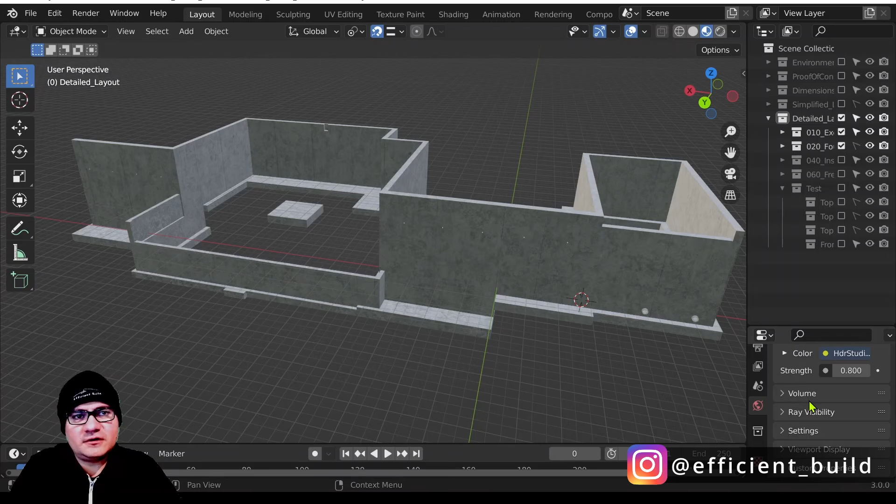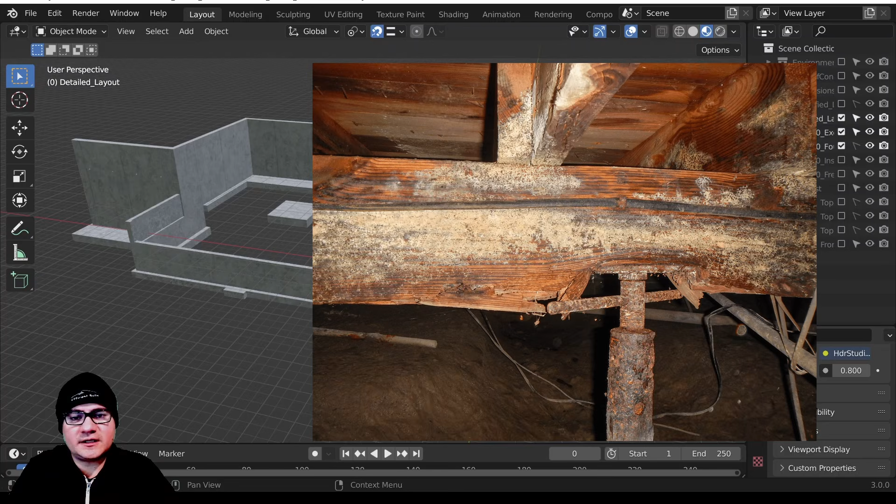If you're not aware of this, concrete is actually porous and has the tendency to absorb water. This water can eventually seep into your below-grade basements and similar structures, and it can rot your materials inside the house. It can create an unhealthy environment such as mold. And even from the structure perspective, it can make its way to the rebar and corrode it, eventually degrading the performance and quality of your house. That's why waterproofing is so important.

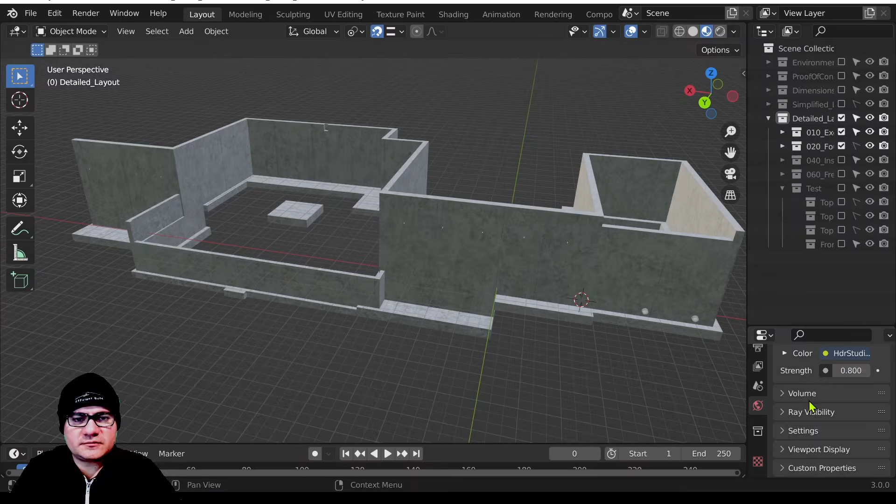So let's talk materials. The system that we liked the most was Polywall Building Solutions' waterproofing system for foundations. We really liked it because it is easy to apply, or it appears to be easy to apply.

And the reason I say that is because we actually didn't end up using the full system. But let me explain how it works, and then I'll explain the intricacies of it.

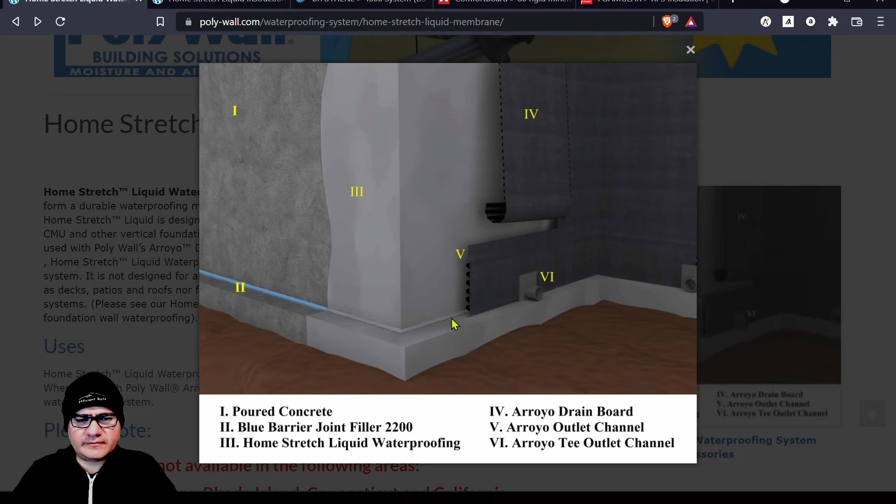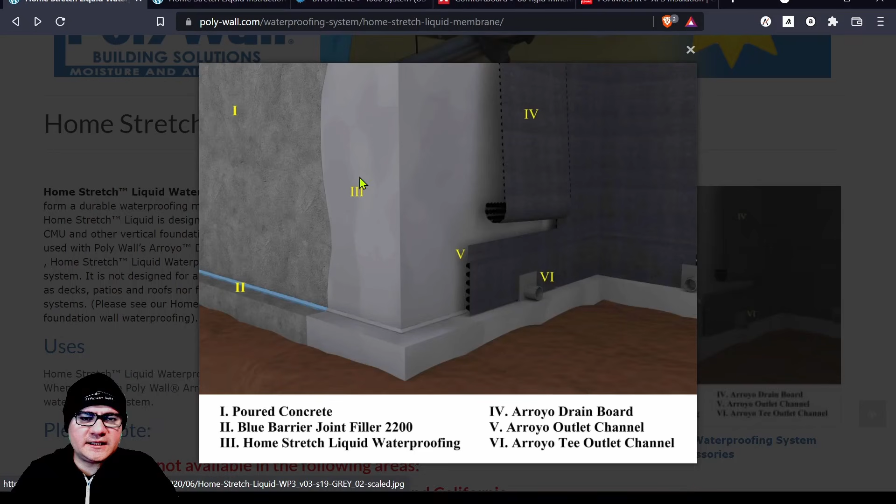So the first step in doing the waterproofing for the foundation would be to apply the blue barrier joint filler, effectively this blue thing you see here. Its purpose is to protect all cold joints, for example the gap between the stem walls and the footing, and also to protect any big holes that may be in the walls. That is additional protection for water.

Then the next step would be to apply the Homestretch liquid waterproofing, and this is mostly the reason why we ended up liking this system. It is actually liquid applied, so you can spray apply or roll it. It's very similar to painting, so you'd need to apply 3 coats, each coat taking a day to cure. It seemed extraordinarily easy to apply, and that's why we ended up choosing this system.

Finally, there's the Arroyo drain board, and what this does is give water a path to exit and be diverted away from the foundation. As you know, water is the enemy of all houses. Effectively, water can seep into this drainage mat, come down, and then be expelled onto the French drains and diverted away from the house.

All that said, we did not end up using the Homestretch liquid waterproofing, and the reason is cost. So we ended up using GCP's Bituthene 4000 system.

This is a peel and stick application, kind of like a plastic HDPE that gets glued onto the stem walls. The only reason we didn't end up using the liquid Homestretch from Polywall was cost. When we were about to purchase it, the price tag came in at around $18,000, and we thought this was a little bit crazy for us, at least in our case.

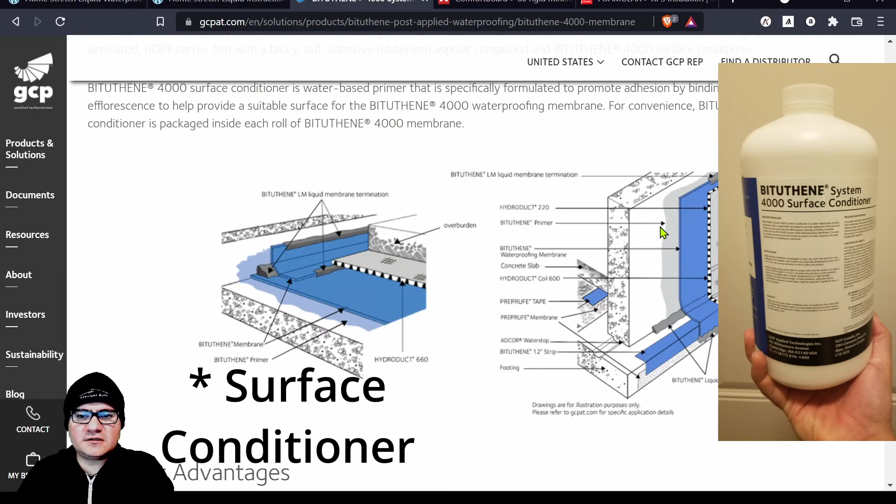The first part of their system is to apply the Bituthene surface conditioner. What the Bituthene surface conditioner does is capture the dust coming out of the green concrete. If you've been near green concrete, you'll realize it's an infinite source of dust. It doesn't matter how many times you clean it, next time you come around it's full of dust again. Who knows why, but anyway, the surface conditioner captures all this dust and creates a nice surface for the Bituthene membrane to be stuck or applied to the wall.

So then the next step is to apply the Bituthene liquid membrane. Notice this actually covers the same functionality as the Polywall Blue Barrier 2200.

We ended up using Blue Barrier 2200, because that's what we were going to use for the full system, for the cold joints between the stem wall and the footing. We also purchased a liquid membrane Bituthene mastic for the borders between the membrane and the concrete at the top of wall and at the footing.

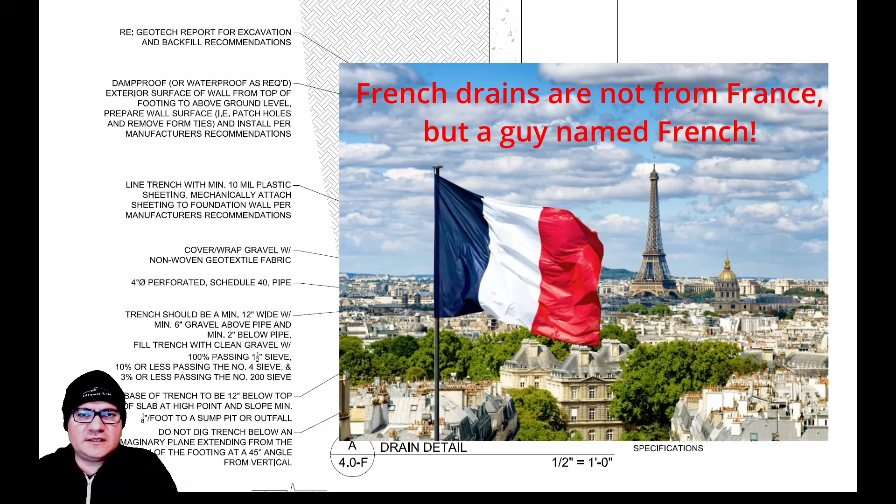So let's talk about French drains. What is a French drain? The main purpose in life of a French drain is to divert water away from the foundation should it ever accumulate next to it. This is a nice little detail provided to us by our soils engineer.

As you can see here, we have the stem wall, the footing. This is a slab and whatnot. And here's the French drain. The requirement is to have a 10 mil plastic, equivalent to the Bituthene 4000 we are using, except ours isn't as short as this—we run it through the entire wall because we don't want any water penetration.

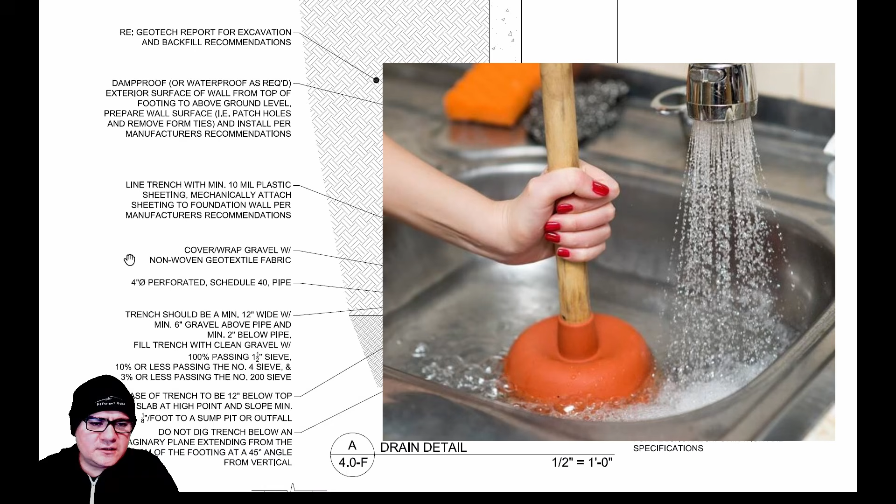Then we have the non-woven geotextile fabric, a very important component. It's actually like a filter—it allows water in but doesn't allow dirt to go through. That makes it so the Schedule 40 PVC inside doesn't get clogged. It's not the same textile fabric you'd buy for gardening at Home Depot; those can allow dirt through and clog your pipe. So it's very important to use non-woven geotextile fabric.

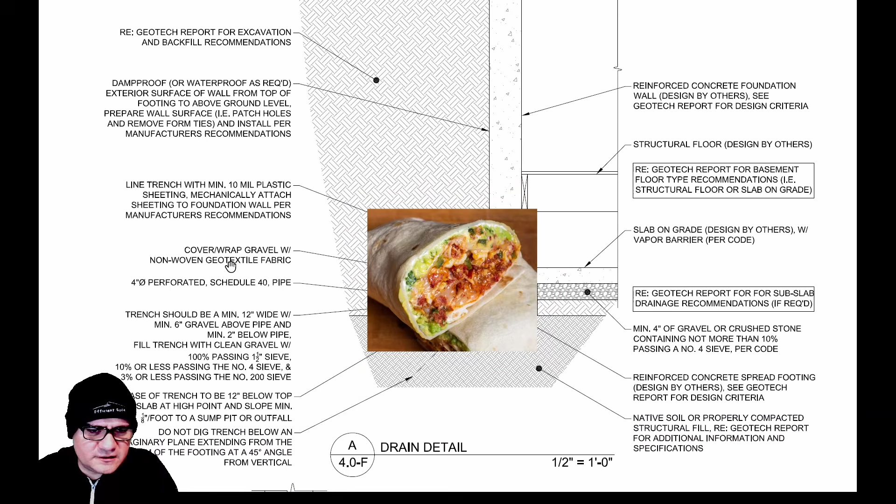Finally, here you have the crush rock. As part of the burrito, that could be the rice. The non-woven geotextile is the tortilla, and your 4-inch Schedule 40 perforated pipe is the meat. Schedule 40 is important because, as you notice in this detail, there's a lot of dirt and weight, so you need a pipe that can handle it.

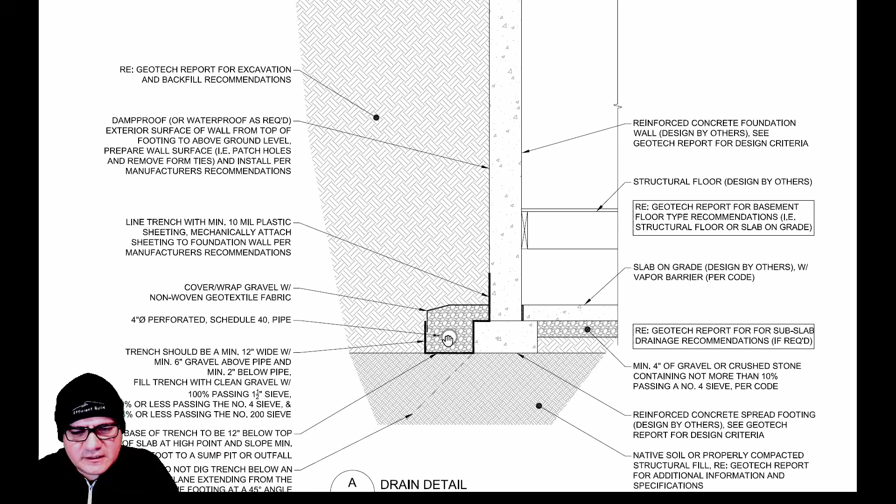It needs to be perforated because water accumulation could happen at any point around the house. So you need to allow water to rise to a level and eventually find its path onto the PVC pipe and exit the house. Fortunately for us on the mountain, we can exit to daylight, versus a lot of flat ground houses that end up using a sump pump.

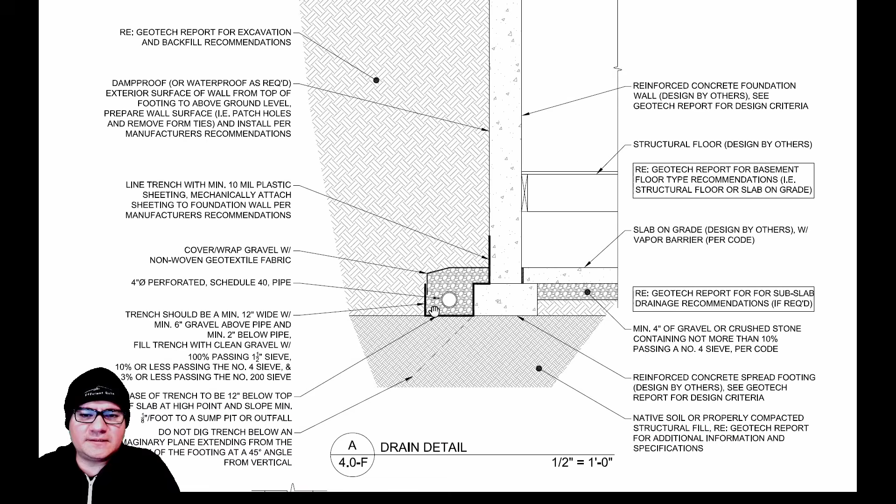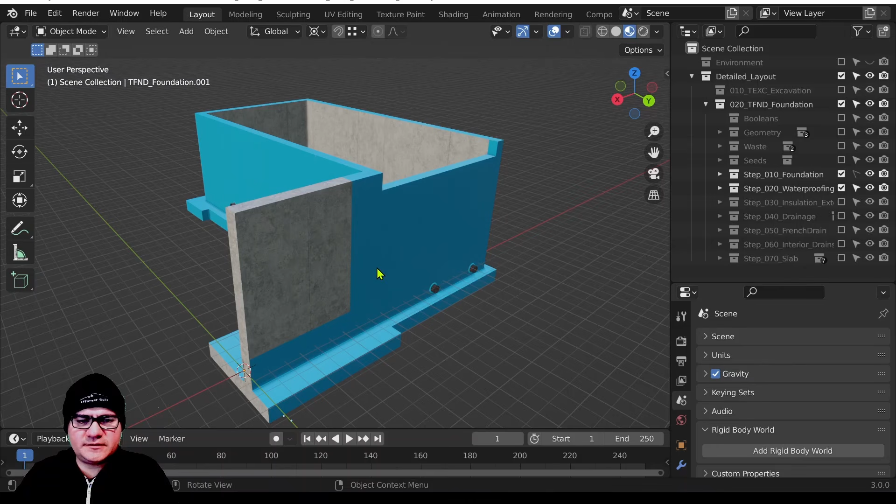So let's review our assembly detail. Here's our naked foundation, and we've already discussed the waterproofing. The reason you see this blue is because, like I said, we intended to use the liquid Homestretch from Polywall, but ended up replacing it with the Bituthene. We actually covered the stem wall because we had the material and didn't want any seepage of water onto the basement.

With the waterproofing in place, this blue layer, the next step is applying exterior insulation, which will be the next topic of this video. The reason I haven't spoken about it yet is because most people don't actually apply exterior insulation, and we'll cover it in the next video.

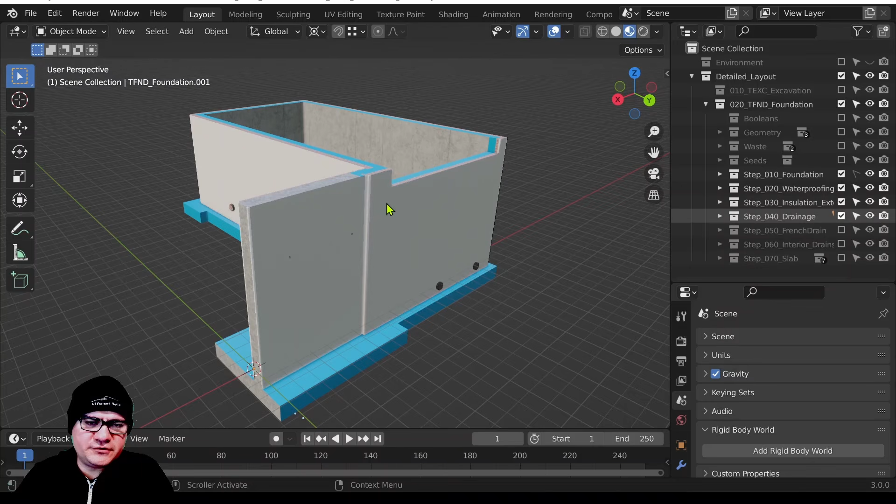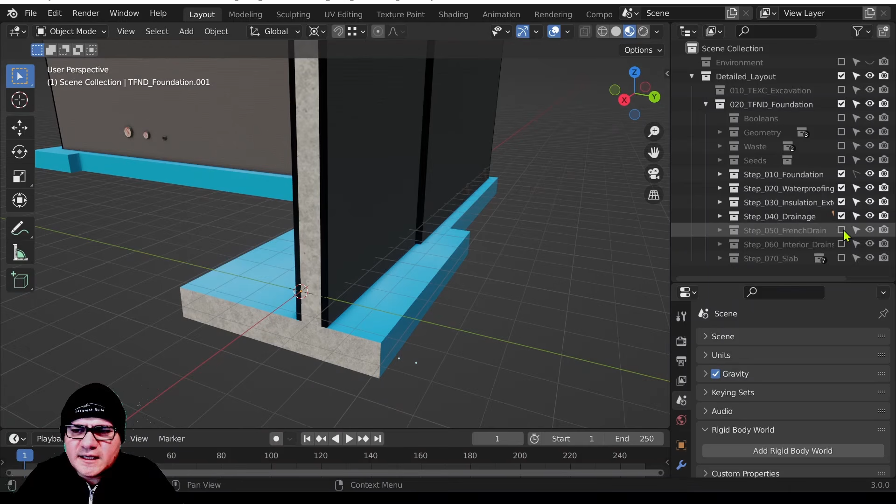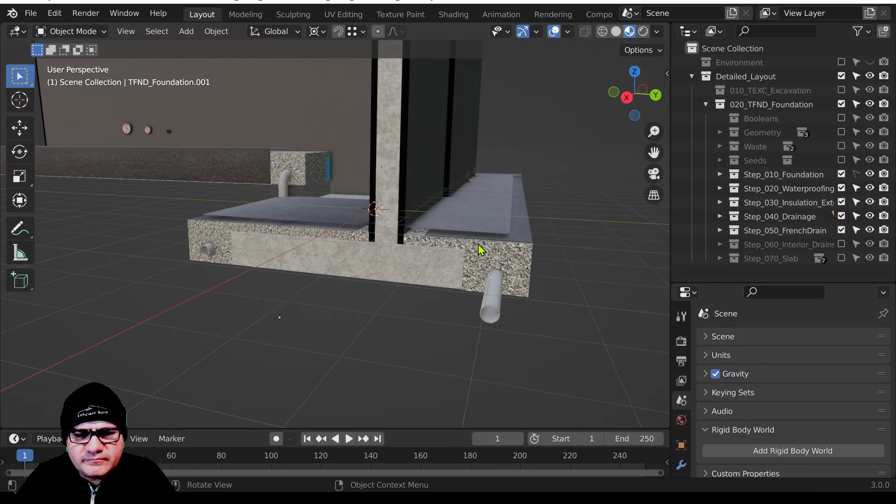Once you have your exterior insulation, on top of it you apply your drainage mat. There's a small gap on the drainage mat that allows water in—it's a dimple mat that acts like the non-woven geotextile fabric, letting water drain all the way to the bottom and eventually down to the French drain and pipes that divert water away from the house. Notice how we wrap the crush rock like our burrito, with the crush rock and the pipe.

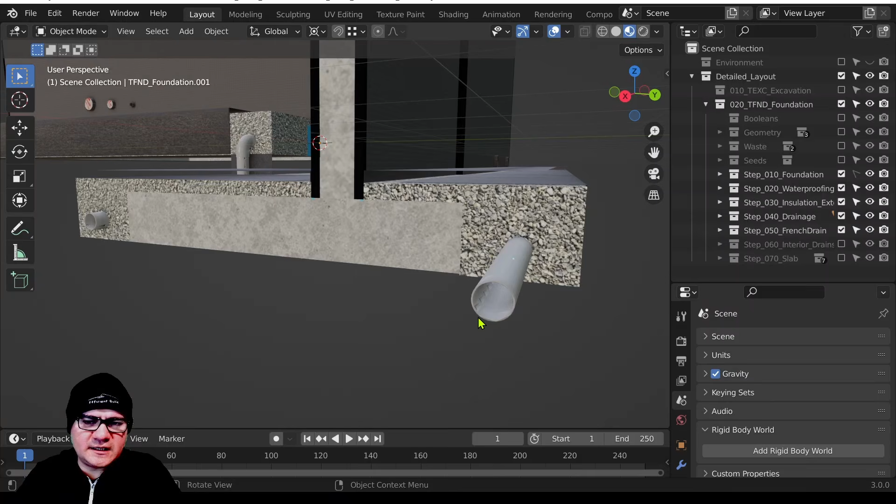The pipe is very important to be perforated, and to be honest, we actually have 3 holes. Typically there's a big debate about whether they should be down, up, or whatever. It's just better to have a few. The theory of the French drain is that water will rise, come in through the holes, and eventually find its way out of the house. So this is the detail for our French drains.

So now let's talk insulation.

I have actually become a huge geek on insulation over the past years, mostly from videos and building science best practices that I've been seeing over time. And this is actually one of the main reasons why we decided to build our own house, because a lot of houses you see built, either by production or in general, get built the cheapest way. Even high-end houses don't get built to the standards that many houses can. A lot of people only seem to care about a nice kitchen and having it look nice. But in reality, there's a lot more to a house than just a nice kitchen.

Because we are in Colorado and we're in zone 7, super cold, insulation is very important. So all building scientists and experts recommend putting exterior insulation and covering the entire envelope from foundation all the way to the roof. So let me show you.

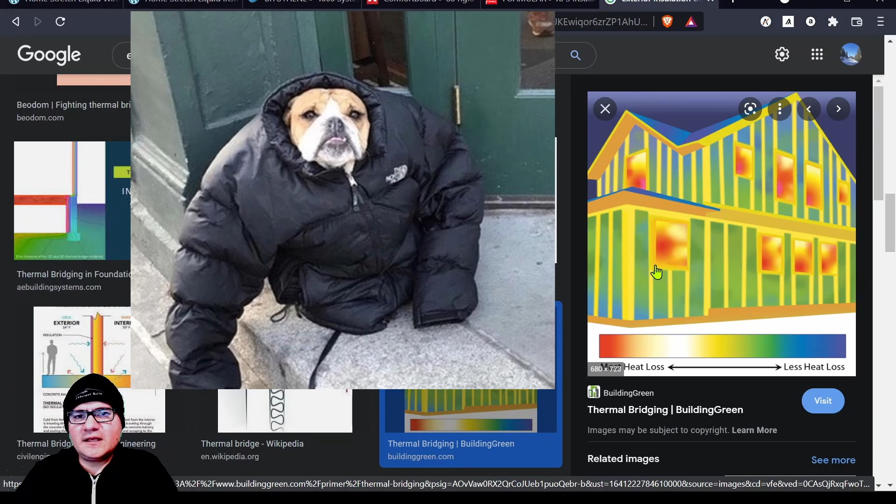This is an analogy from Matt Risinger that I've heard many times: imagine your ribs. You imagine if you didn't have a coat, or if you had a coat with stripes or something - this is effectively what you would have. You would be cold in some places and warm in others. So that's not the ideal scenario. The ideal scenario is to have continuous exterior insulation surrounding the entire envelope of the house.

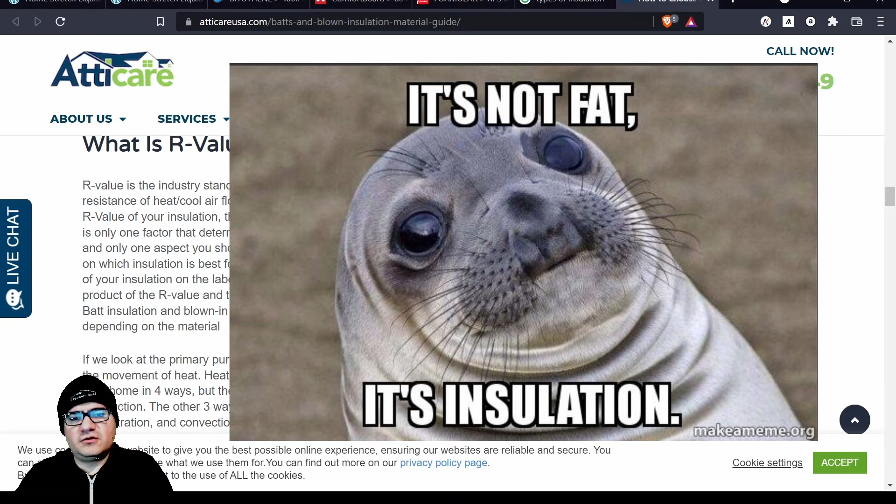And that's effectively what we're going to do, following the best practices of building science. There are many types of insulation, for example fiberglass, cellulose, mineral wool, open cell foam, closed cell foam. Its main purpose is to prevent the transfer of heat. That transfer of heat is rated by the R value, and effectively the bigger the number, the less energy gets transferred in heat from one end to the other.

Another nice advantage of insulation in general is that it makes for a more comfortable space to live in.

Let me talk about these insulations very briefly. There's fiberglass - that's literally what it is, what it says. It can be difficult to apply and cause uncomfortable rashes because it's literally glass, and it can microscopically be cutting you, which is what you'd be feeling. So it requires special care. We will not be using fiberglass at all.

Then there's cellulose. It's typically blown in, kind of like a pillow full of feathers. It's similar, not the same, but it looks similar.

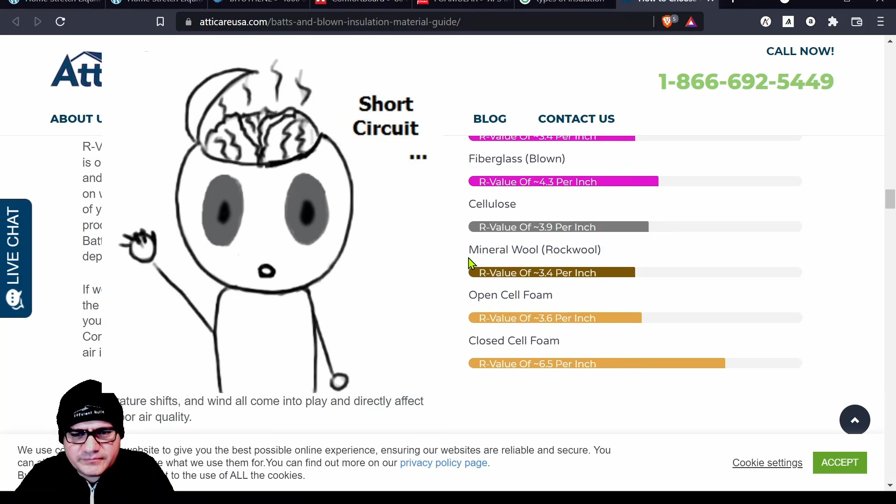Then there's mineral wool, and mineral wool is actually our top choice for here in Colorado. It is not the highest rated R value, but it has properties that other insulations don't really have, and that is that it is extremely good against fire prevention. It can withstand maybe 5 to 10 times the amount of heat compared to these other insulations. It is also very good against animals or insects like termites, since it's actually rock - they don't like to chew through it. The general process for mineral wool creation is they grab some kind of volcanic rock, grind it somehow, and then create the insulation. So it is an extraordinary product that you will see us use significantly.

Then here we also have open cell foam, and a lot of ICF foundations have embedded insulation that use open cell. I personally don't love open cell because it's kind of like the insulation that's used for coffee cups.

Let's say if you're in like an office or something. The bigger problem with open cell is that it has a tendency to absorb water, and over time, if it absorbs water, it loses its strength.

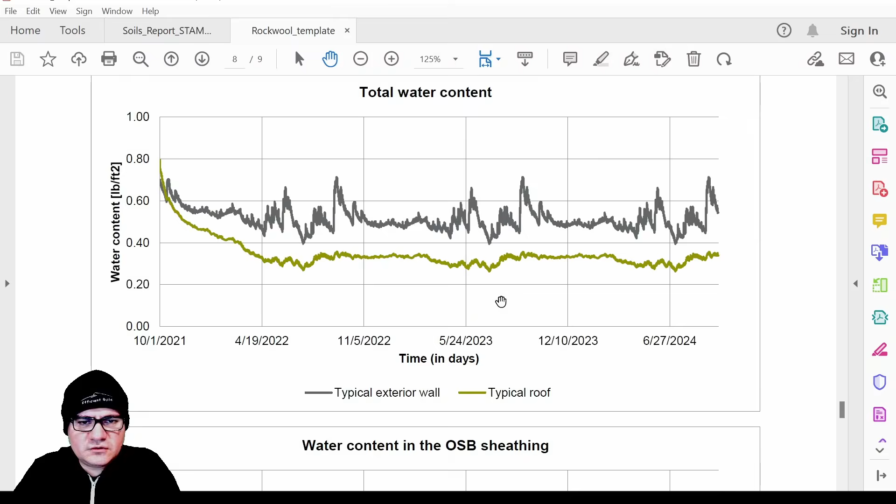And so that involves the foundation. So this is their analysis. It's actually a 9-page document, and they go through the different assemblies and whatnot and recommendations. They not only look out for temperature, but they also look out for the very important condensation lines.

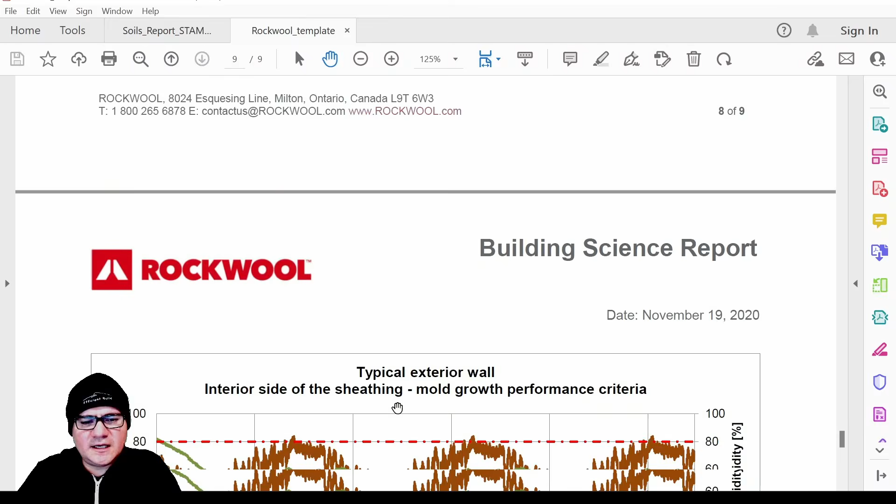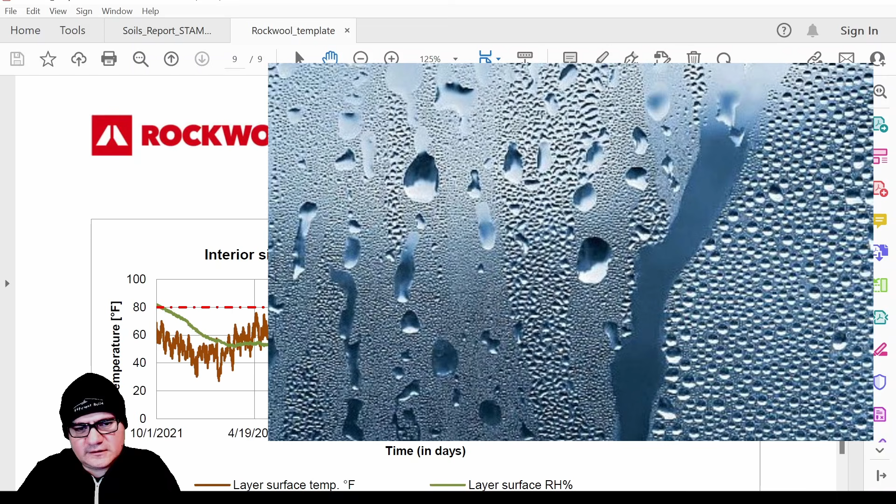Typically in every zone in the US, you will have a time where it is likely that you will condensate water on the walls, and condensation is really bad because it can create mold on the surfaces. The other day here in Colorado, I was talking to a guy and I told him this wall could potentially create condensation in the cold, and he kept saying, well, Colorado is so super dry that it would never happen. Well, condensation is not a factor of dryness alone. It is a factor of delta in temperature.

So if you're really warm inside and you're really cold outside, you will create condensation, because typically a home will have an acceptable relative humidity of 30 to 40% here in Colorado at a temperature of 70 F, versus being outside where it's like super cold, close to 0 Fahrenheit. By having that change in temperature, you are creating the possibility for condensation to be created.

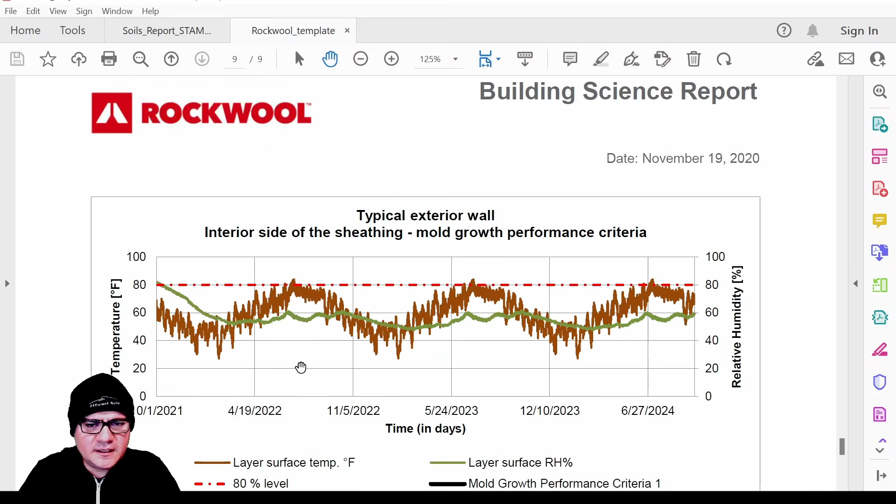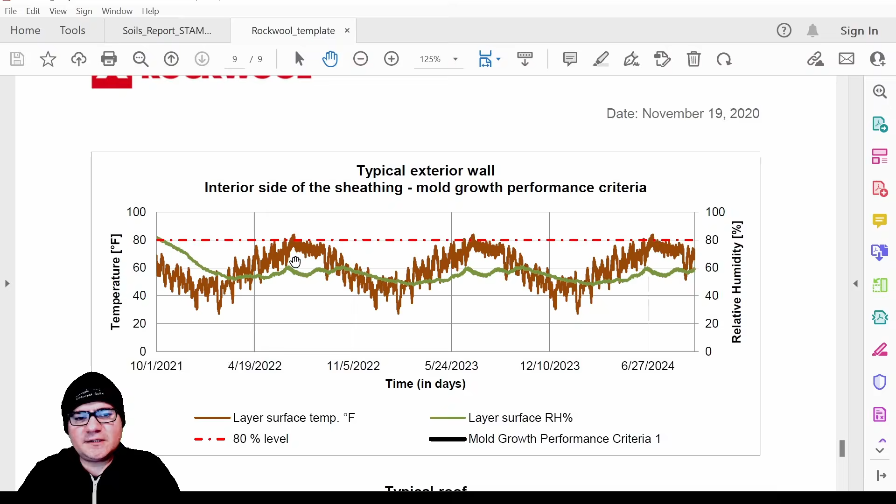So here, Rockwool gave me this analysis, and they manipulated my assembly up to the point where the condensation and mold growth was kept to a minimum. And so that's how they came up with the recommendation of 4 inches for our envelope.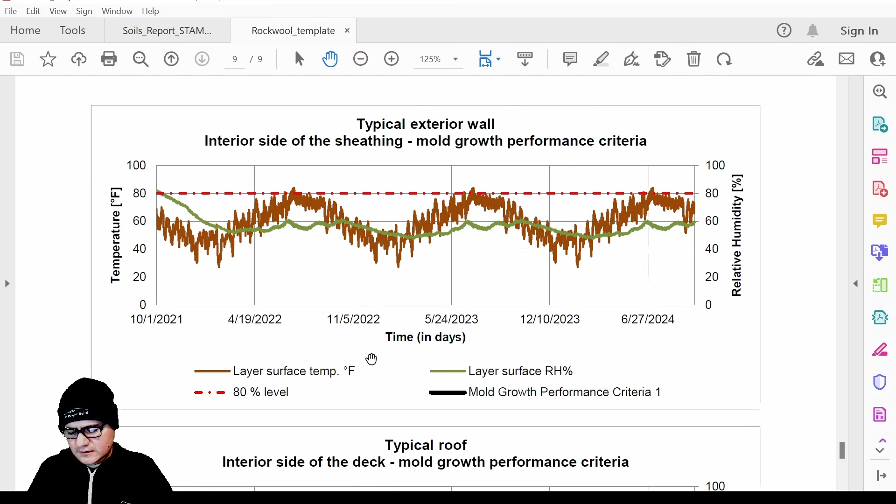So 4 inches of Rockwool is equivalent to 4.6 R per inch, and that's about 18.4 R value total. So now that we have the analysis, the selected product for the exterior envelope of the house will be Comfort Board 80 from Rockwool. It is just a little bit harder insulation that can withstand the exterior environment a little bit better.

We did run into a hiccup with Rockwool in general, and that was when I called them to order the panels. They said that they didn't have any available for 6 months, and that was a tremendously huge problem. As you know, 2021 has been a very difficult year for the supply chain, not only insulation. And so because of this, we started thinking, okay, so what can we do in the meantime, or what other product could we use?

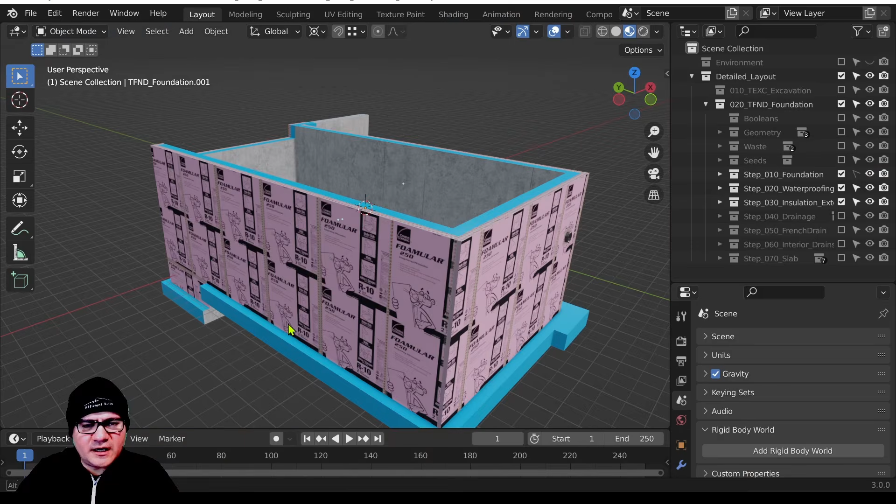So we started thinking, and we said, okay, well, our insulation, at least this first phase, is going to be for the foundation, and the foundation is going to be mostly below grade. So what that means is, with fire being our top concern and being below grade, it's not going to burn because it's going to be buried.

So at most, maybe 6 inches will be exposed, and we will be covering this with metal flashing anyway. So we decided to use Owens Corning XPS insulation, the top of the line when it comes to R value. And yeah, that's what we decided to do.

An interesting story about the XPS insulation. We looked for it here in Colorado, and each 4-inch panel was $130. We actually found it way cheaper in Wyoming for $80, the same insulation. So we ended up taking a nice little trip to Wyoming to purchase these products.

Another story related to cost is the Bituthene I discussed for waterproofing and the geotextile. I also looked for it here in Colorado, and each roll was like $400. Then I found it in North Carolina for $230. So guess what we did? We ordered it online and shipped it over to Colorado. So we've been doing a lot of that kind of stuff to attempt to save money.

So now let's talk a little bit about XPS insulation. When I started my research, we were thinking of using XPS until eventually fire became a huge top priority, so that's when we ended up switching to Rockwool. But in my initial research, when it came to insulation types between polyiso, open cell, closed cell, and so on, XPS ended up being the top performer and our first choice. And since we're going to be doing this below grade, this will end up working out great.

One interesting characteristic of this XPS insulation is that as temperature goes down, it actually increases its R value. And because we are in zone 7 and we are protecting our heat from the cold, it is actually benefiting us when it needs to get to work, I guess.

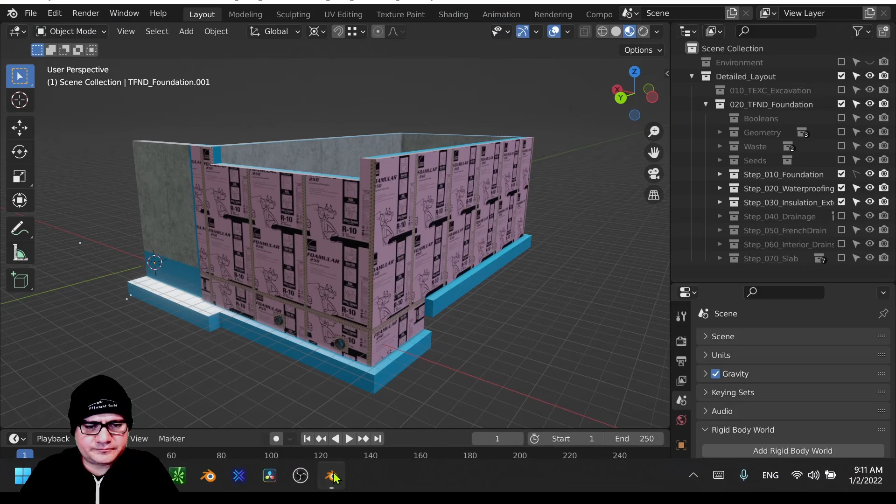So this is our assembly. Actually, the way this is shown is incorrect because Owens Corning recommends installing the panels horizontally. Once you install the panels horizontally, you apply the joint sealer. And the way you install the panels is by gluing them to the substrate. Since we've been doing this in the winter, we've been having difficulty finding glues that can actually work in the cold, like below -4°C, so I highly recommend using mechanical fasteners.

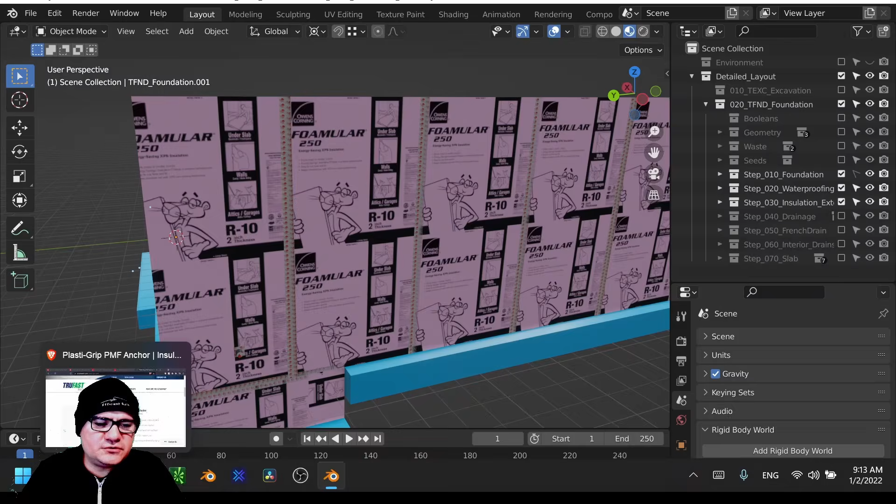And the mechanical fasteners we've been using are these Rodenhouse Plasti-Grip fasteners. They're thermally broken, so what you end up needing to do is drill a hole in the concrete, and then with a mallet you push this onto the walls. Another reason for using this, even if it's not cold, is the foundation walls are not perfectly flat like they are here. They're typically full of bumps and whatnot, so even if you use glue, it may end up being glued to one side but not the other. So when you use the Rodenhouse fasteners, you take care of all those problems, and you end up with a very nice performance. So that is it, I guess.

Hopefully it was informational for you. A lot of these brands, we're not sponsored in any way or form, but we're definitely going to use them. We highly recommend all of them. I also did not want to go into the super details of installation because they have very nice documentation, and I recommend you read them. We're just giving you all our experiences from the things we're having to do, from cost, supply chain, the different decisions that we're having to make due to different circumstances. So yeah, if you have any questions and you're still here, and hopefully it wasn't too boring, see you in the next one.